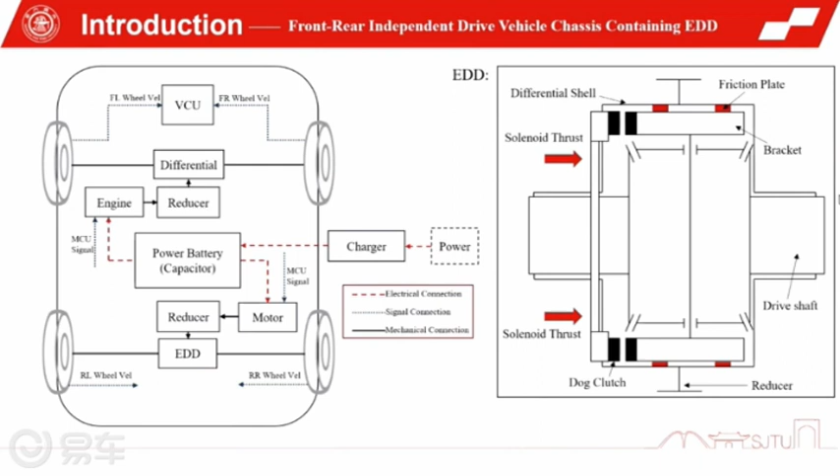The figure on the right is the structure schematic diagram of EDD. EDD has the basic characteristics of a differential, including planetary gear set, half-shaft gear set, differential bracket. The difference is that there is a dog clutch on the side of the differential bracket. By evenly opening holes on the shell, the driving end of the clutch is arranged outside the shell. In addition, the solenoid is also a key component. After being energized, the electric force is generated to push the driving end of the clutch to the right to realize the engagement of the clutch. And after the solenoid is de-energized, the clutch is disengaged under the action of the spring.

In order to study the control strategy of EDD engagement and disconnection, it is necessary to establish an accurate and practical dynamic model. The dynamic model should include the transmission system model from the motor to the wheel end and the clutch model that can respond to collision, so as to fully reflect various working conditions of engagement, disconnection, and power transmission. The established dynamic model is shown in the figure. Transmission system models are generally established by mature methods. That is, torsion spring, damping, and rotational inertia are usually used to replace the shaft. Such a model is linear and simple.

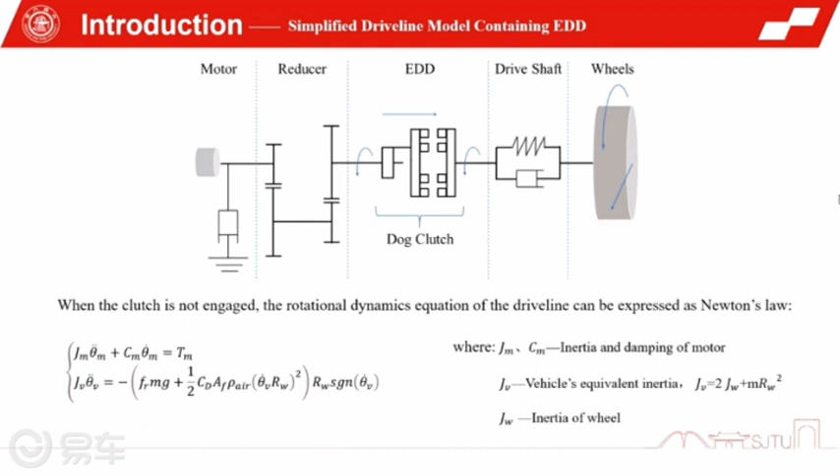However, the dog clutch has strong nonlinearity, which leads us to consider the collision between teeth. Even the collision of the crown chamfer has to reflect the phenomenon of uneven engagement, such as tooth spitting caused by the collision of the crown chamfer. In addition, even if the clutch is engaged, there is a tooth gap of about 1.4 degrees between the clutch teeth, which is converted to 14 degrees at the motor end, which means that idling may occur when the motor torque changes greatly, and there will be impact after idling, so this gap needs to be considered.

The establishment of the dog clutch model is the most critical and complex part of the dynamic model of the whole system. In this section, the contact force caused by metal collision is considered first. Then consider other external forces, and finally integrate them into a complete clutch model to reproduce the coupling motion of translation and rotation. The contact force of the clutch is relatively complex. This paper established the clutch collision dynamic model in 3 cases, in which the schematic diagram of case 1 to case 3 is shown in the figure.

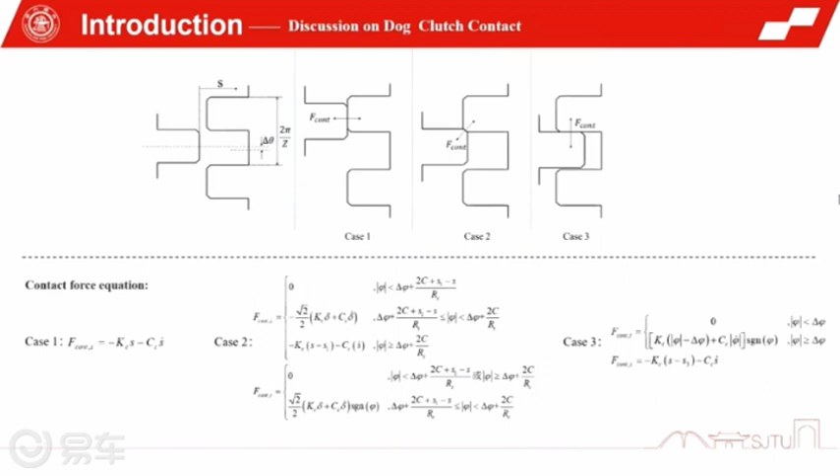In case 1, the top of the clutch is in contact; because the clutch is immersed in oil, the dynamic friction coefficient between metals is very small. Therefore, in the dynamic analysis, the influence of friction is ignored, and there is only axial force at this time. In case 2, the clutch chamfer collides. The displacement of the clutch is medium. At this time, there may be no collision, or the crown chamfer collides. The axial force and the tangential force need to be discussed separately. In case 3, the clutch displacement is very large. At this time, there may be no collision or collision between teeth.

After establishing the driveline model according to the above method, if the nonlinear driveline model is directly used for the model predictive control, the solving speed can hardly meet the real-time requirements. Therefore, the following reasonable linearization of the nonlinear model is required. First, it is considered that the vehicle speed is almost constant in the MPC prediction time domain. Secondly, rolling resistance can be regarded as interference.

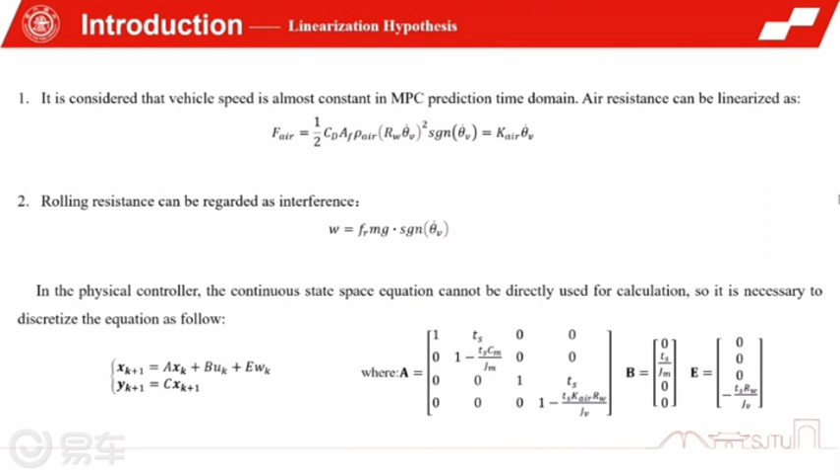In a physical controller, the continuous state space equation cannot be directly used for calculation, so it is necessary to discretize the equation as follows. According to the current engagement condition, the engagement controller adaptively switches between active control and fault-tolerant control. The wheel speed is measured by the anti-lock brake system sensor to estimate the rotational speed of the passive side of the dog clutch after the vehicle control unit sends the engagement gesture.

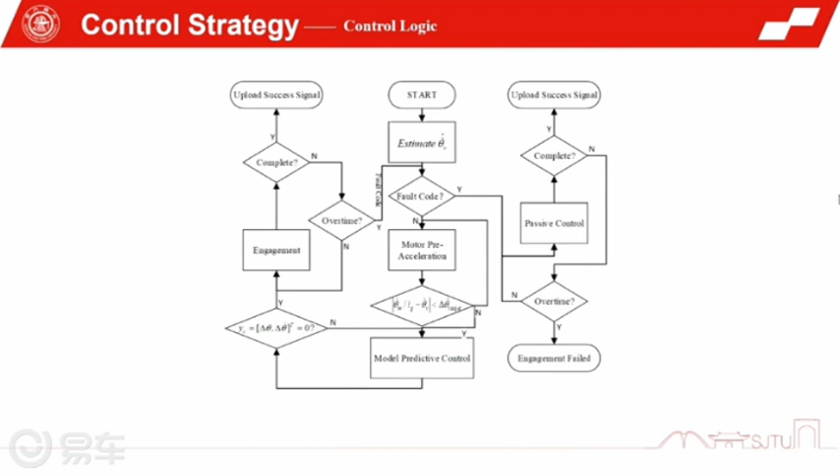The next step is for the system to self-check whether there is a fault code. If no fault code is detected, it indicates that the active controller is trouble-free and the active control process can be applied. Otherwise, it indicates that the active controller fails and the passive control is applied. The specific process is shown in Figure 4.

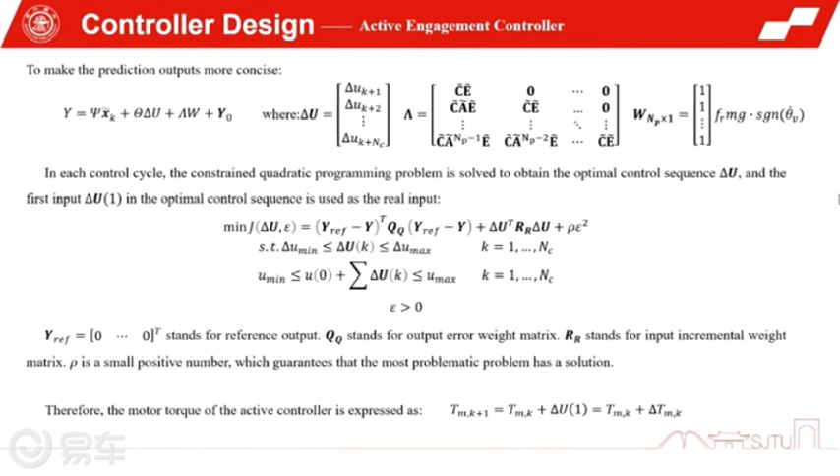Based on the model predictive control, the active controller aims to adjust the output Y to 0 before engagement. Thereby, the impact torque caused by teeth side collision can be reduced or even eliminated. To limit the change rate of torque of the motor, the input should be expressed as an incremental form.

To avoid the engagement failure, considering the malfunction of the active controller or other components, an exhaustive fault-tolerant controller is designed. Thus, possible reasons of faults should be summarized before. Case 1 is the malfunction of the active controller, and case 2 is the malfunction of the displacement sensor, which makes it unreliable to judge whether the engagement is successful.

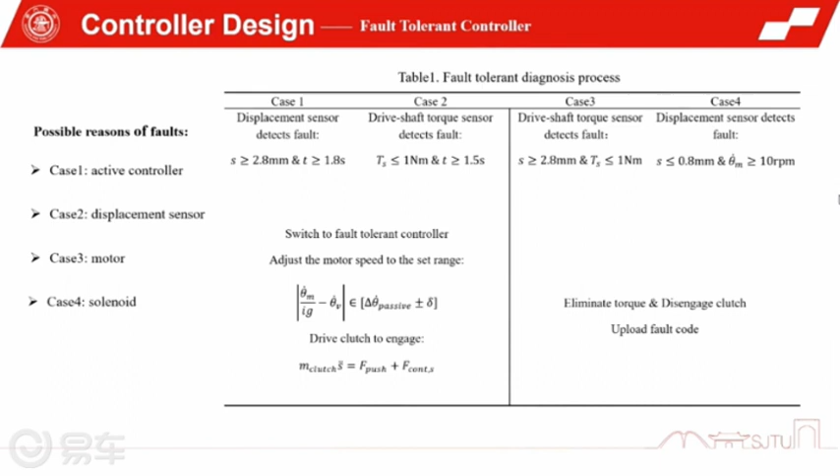Case 3 is the malfunction of the motor, which makes the driving wheel lose power and become the driven wheel. And case 4 is the malfunction of the solenoid, which makes the clutch unable to engage without the thrust. EDD, in order to ensure the above faults will not affect driving safety, fault diagnosis measures and countermeasures are designed respectively as shown in Table 1.

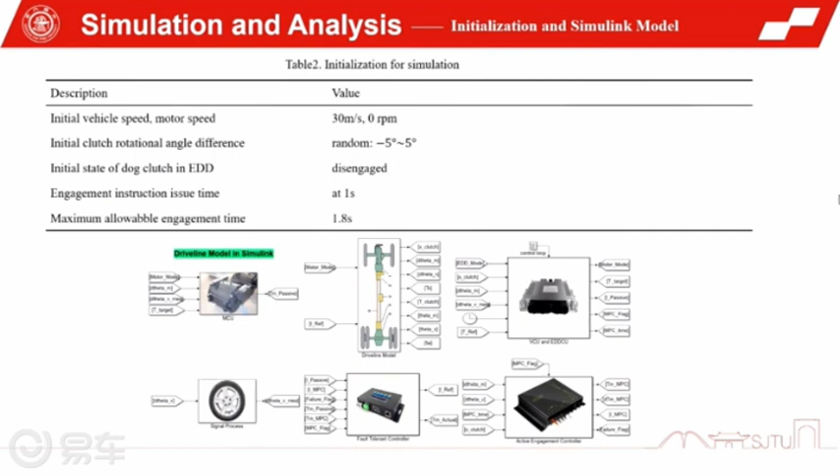The integrated controller combines an active engagement controller and a fault-tolerant controller. Three typical scenarios are selected for simulation to verify the effectiveness of the integrated controller. The common initialization conditions are shown in Table 2, and the Simulink model is shown in Picture 5. Active control strategy is adopted when the components of the EDD controller are intact and no fault code is detected in the system. The simulation results of active engagement control are shown in Figure 6.

After receiving the engagement command at 1 second, the active controller immediately pre-accelerates the motor and then uses MPC to ensure the rotational speed difference and the rotational angle difference converge to 0. The preparation of engagement is completed at 1.25 seconds and the engagement is successfully completed for the first attempt at 1.45 seconds after stabilizing for 0.2 seconds.

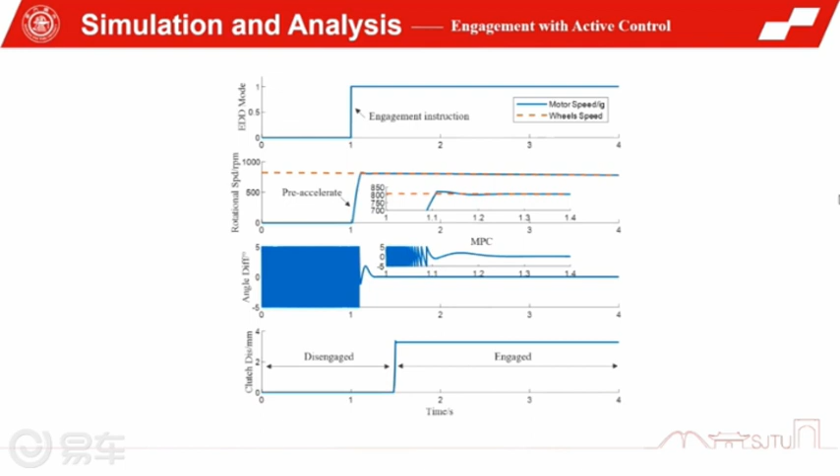In this process, the motor speed can quickly follow the wheel speed, and there is almost no overshoot. Because of no teeth collision during the engagement, the clutch displacement quickly reaches 3.2 millimeters, which means the clutch is already in the engagement state.

If a fault code is detected by the integrated controller at the initialization period, the integrated controller will disable the active controller and automatically change to the passive control mode. The simulation results of passive control, as shown in Figure 7, rely on teeth-to-teeth collision to eliminate the rotational speed difference. At 1.72 seconds, the rotational angle difference and rotational speed difference before the engagement are not eliminated.

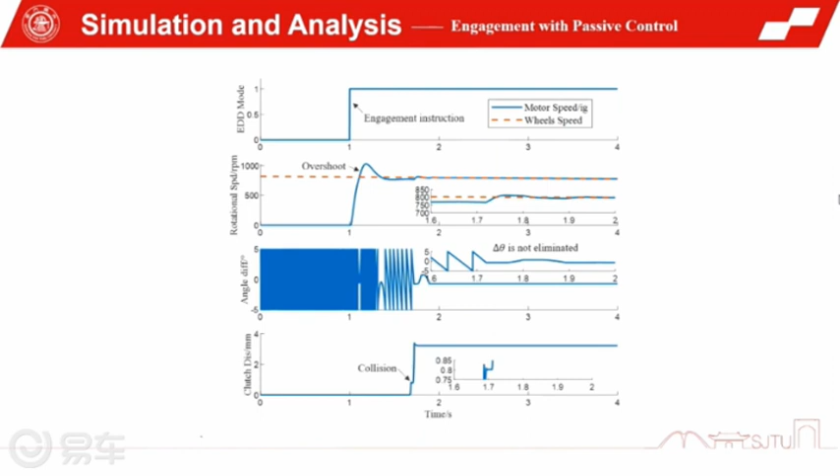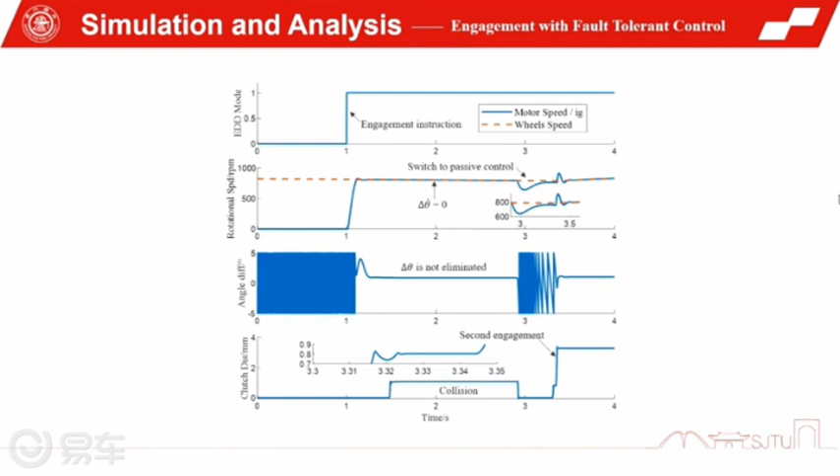The clutch displacement at 0.8 millimeters appears stretching because of collision between the teeth tops. Compared with the active controller, the total engagement time is extended by 0.27 seconds. When the active controller fails, the EDD control system detects the fault and switches to the passive control mode. The simulation results of fault-tolerant control are shown in Figure 8.

The last part is the conclusion of this paper. The first one is to optimize the engagement process of EDD and reduce the impact torque of the dog clutch, an active controller based on MPC is designed. The second is to augment the reliability of the EDD and control system, an auxiliary fault-tolerant controller is designed. And the third is, through the comparison of EDD simulation results,

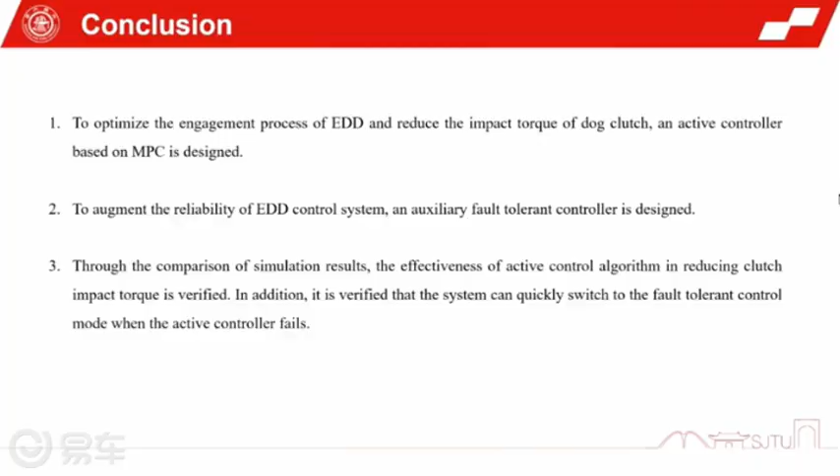the effectiveness of the active control algorithm in reducing clutch impact torque is verified. In addition, it is verified that the system can quickly switch to the fault-tolerant control mode when the active controller fails.